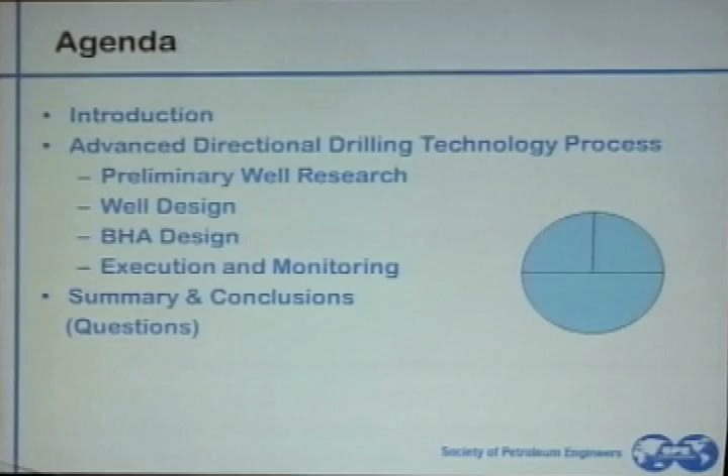The agenda today will start with an introduction, followed by looking at the process. We'll start with the preliminary well research through to execution and monitoring, and then finally we'll have a summary and answer any questions you may have. This is a lot of information to crunch into 20 minutes, so if there's anything you'd like to learn more about after this conference, I'd be happy to see you and discuss further.

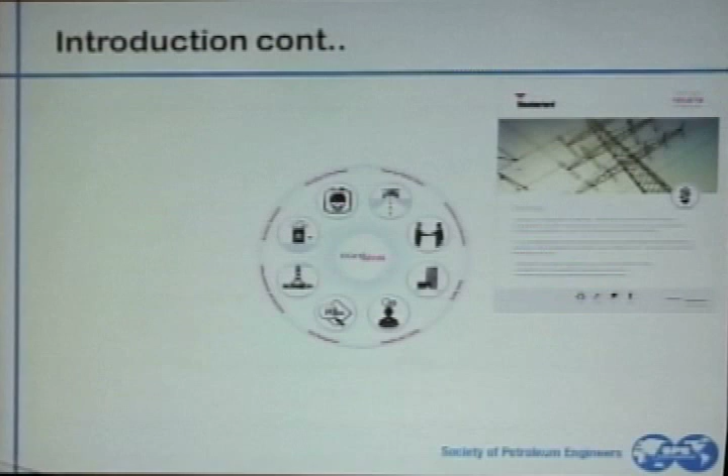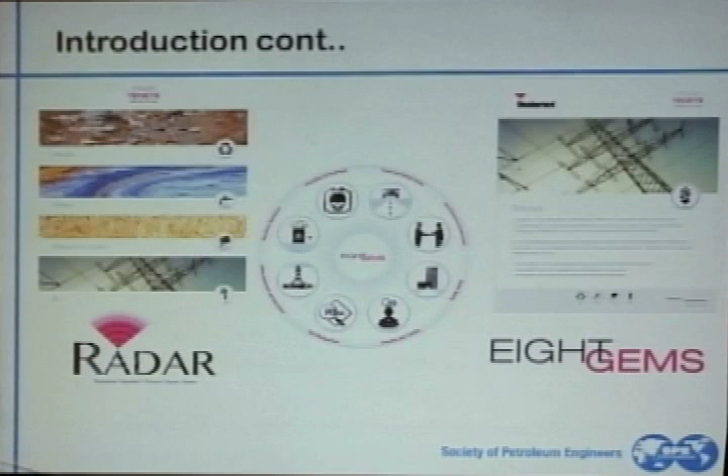Most oil and gas companies and service companies alike have something in their policy statement to conduct operations with minimal risks to both personnel and the environment. We try to make it part of our policy to equip our employees with the right tools so they understand the rules and regulations that govern the countries and environments they work in, not only what they do through their work, but also how they do it in their daily lives.

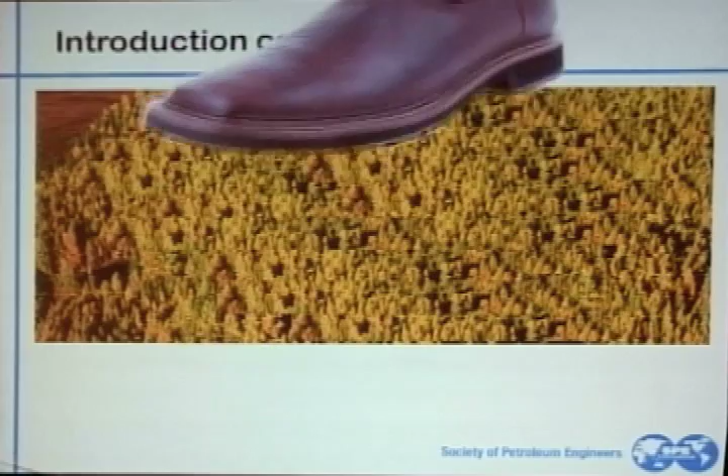But one thing we cannot ignore is that even with these tools, the rig still creates a rather large footprint. This footprint can be reduced, but it takes looking into things like reducing the physical size of the footprint itself, which can be done by reducing the rig size and the infrastructure used on the surface.

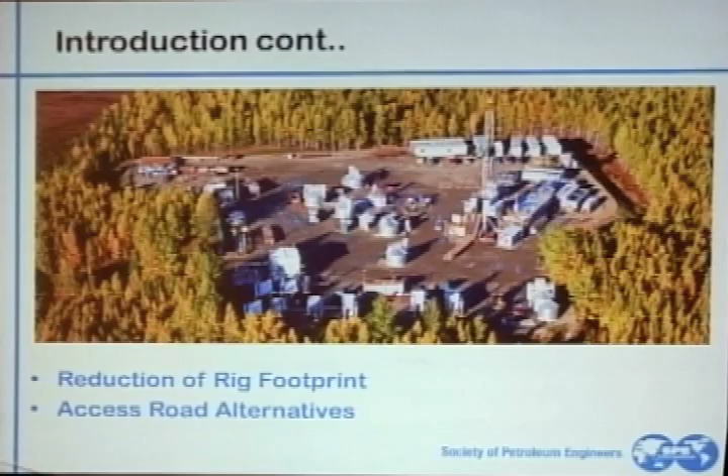But of course, with technology today, demands are to go deeper and longer, so this is always a challenge we're still overcoming. Access road alternatives are being looked at, ways to avoid soil disruption and wildlife fragmentation. Air emission studies are being conducted to reduce the CO2 emitted into the environment.

I want to point in on this CO2 point because it's important to know that when people think of rig footprint or environmental footprint, they can't just think of the actual process being done, the equipment being used, the physical things tied into it, but we have to also think about the time we spend on the actual project.

Air emissions, for example, are time sensitive. The longer we spend on the project, the more emissions we put into the atmosphere. So something a lot of people fail to realize is the time involved.

And finally, waste management. We're working together as an industry. Every year we come out with new technology to try to contain waste management, for example, treating the drilling fluid so it's not harmful to the environment and to the people handling it.

Most, or I should say many, of our locations are quite desolate. There is very little concern about wildlife fragmentation because there is none. Also, things such as noise pollution don't really come into play.

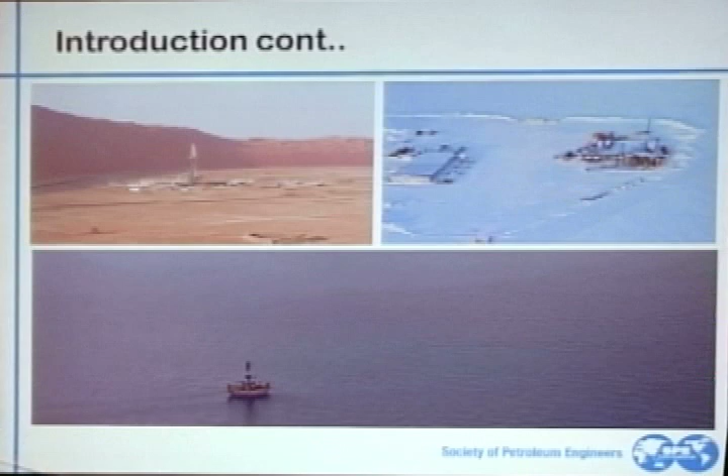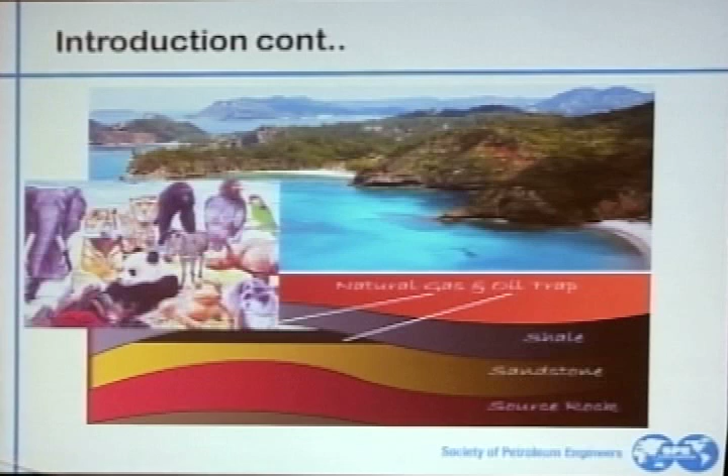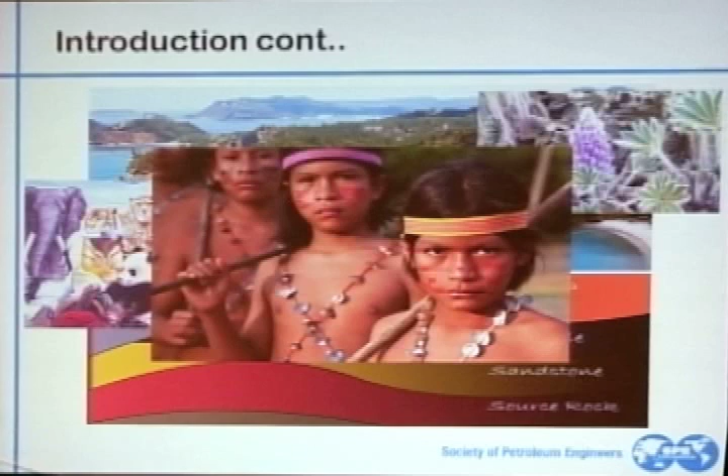But when we're thinking about extremely sensitive environments and want to tap into the reserves below, the challenges we face include endangered species, rare plants or vegetation that rely on a very sensitive ecosystem, or even indigenous people who have had very little or no contact with the outside world and don't care to. These are the intangible things we have to think about when tapping into that reservoir, so we have to ask, how? This poses the question: how do we get here when we have to deal with this sensitive environment above?

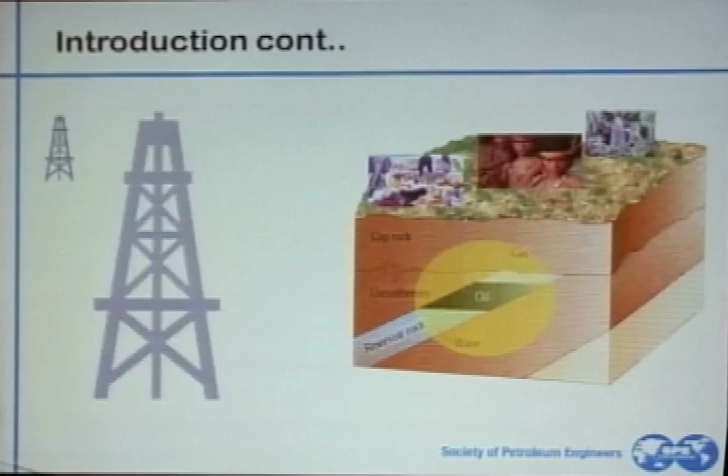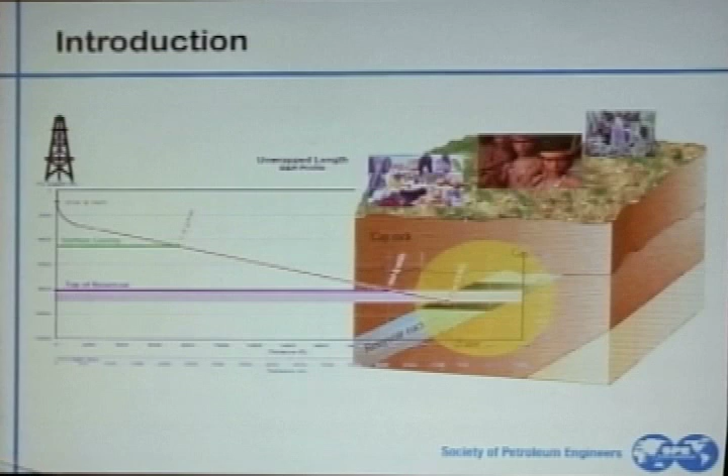Perhaps the best thing we can do is take a step away from the environment altogether and approach the challenge from a different angle. That reduces substantially the footprint above the reservoir, but increases the technical challenges required to drill one of these long, extended wells. So what I'm going to do now is step through the process of what it takes to drill one of these wells.

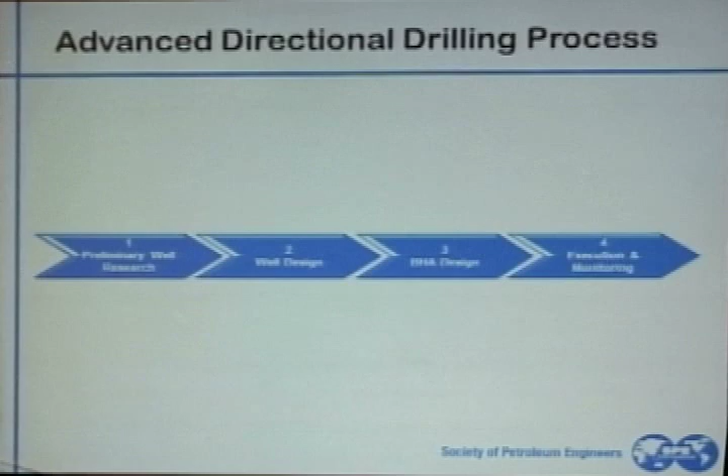Weatherford's advanced directional drilling process is in 4 steps. We start with preliminary well research, finding out everything we can about the formation we're going to drill into, and using that information to design the well. Then we move on to BHA design to decide what we need to successfully reach total depth. Finally, execute and monitor, through drilling process, drilling practices, and ensuring safety for both personnel and the environment.

So we're going to walk through these steps individually, starting with preliminary well research. Geomechanics can tell us a lot about what we're drilling into, looking at the tectonics of the formation and the horizontal stresses that apply. We can learn a lot about what angle of approach we need when we go into the reservoir, as well as what direction.

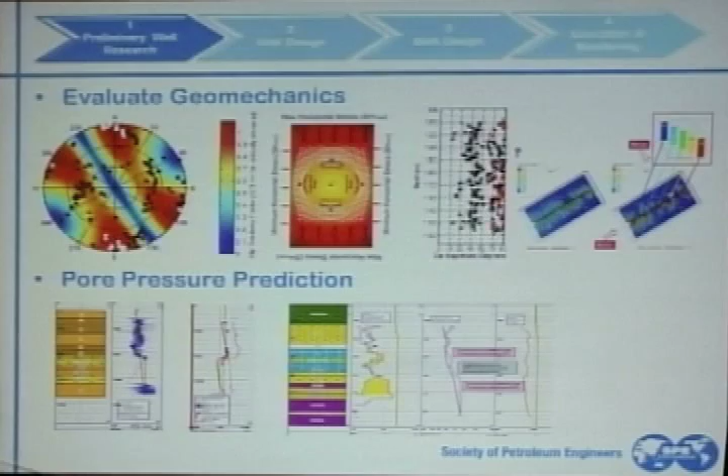Pore pressure prediction: we ultimately want to optimize our hydraulics, which requires us to run up to the max or just below the max limit without compromising the pore pressure. So having a good pore pressure prediction is essential for maximizing hydraulics.

Wellbore stability workflow is about recognizing the things we can and can't control, taking the things we can't control out of the equation—you can't control Mother Nature—and centering in on the things we can control, finding a good process to mitigate those problems and see them through.

Well trajectory analysis comes back to how we're approaching the formation and the type of stresses involved. What do we need to think about with drilling fluid? Hole stability issues, which Latin America has quite a bit of. Casing point selection: how many casing strings are we going to run, what hole sizes do we need, and what's the optimal hole size in the horizontal to keep the cuttings moving up and out of the hole?

And finally, hole collapse analysis. This is basically looking at the maximum limits required to collapse the hole, and then working within those limits by a safety factor.

Once we have all this information, which is very good since we've done a lot of research, we're ready to apply it and move into the well design. The well design is a very critical part—I'd say of the 4 points in the process, well design and execution/monitoring are probably the top 2 to spend the most time and energy on. If you have an improper well design, you can ruin your entire job. You'll have to live with that mistake from the beginning until you reach the reservoir, and if you get it wrong, it can make your life very difficult.

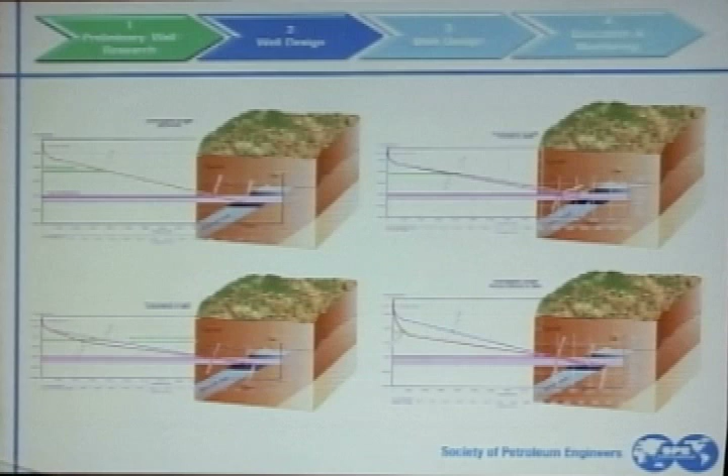So once you have your well design chosen, you move on to actually putting that well design into your well planning software. This can give you valuable information as to what limits you need to have for your BHA, for example, what dog legs you need to create in order to complete the well.

This also gives you good information as to anti-collision, and I'd like to hone in on this part real quick about looking at things from a project management view for the whole project, not just one individual well. Perhaps a lot of information you've perceived is that we do things one well at a time, and that's just not the case. If you're doing a project that involves 10, 15, 20 wells, you look at all those wells on the project from that pad and ensure that the relationship between each well is a stable relationship.

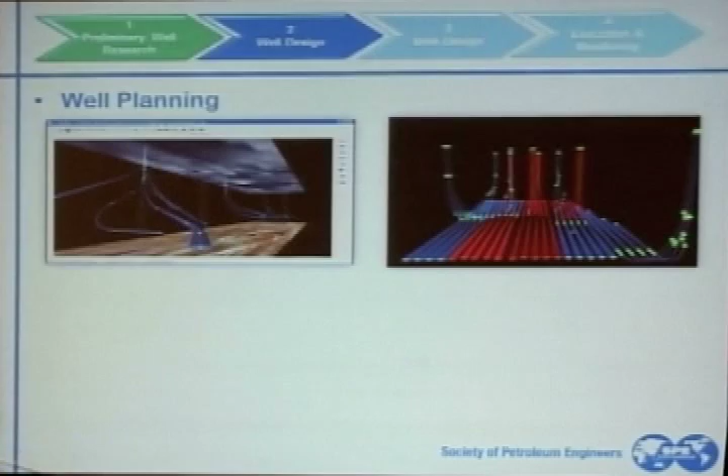If you have a very easy well, even 9 easy wells and 1 difficult well, that 1 difficult well will catch you at the end. So what we try to do is ensure that even if we have to make some of the easier wells a little bit more difficult, to bring the difficult well down to an acceptable level, we go ahead and do that for safety and for the sake of not compromising the whole project.

Torque and drag and hydraulics. After we're finished with getting our well trajectory, we move it into the torque and drag and hydraulics software so that we can determine very important things, especially on an extended well, that we have to live with, which is, of course, the amount of drag that you're receiving from your drill stem.

Because you're going out so long in a horizontal with many miles of pipe, you basically have all that sitting on the well bore, and you're trying to push it through to get to TD. So drag becomes quite an issue, as well as torque - being able to turn that pipe with all the reactive torque and the torque power you need on surface to be able to get the bit to move. Hydraulics, of course, moving cuttings up and out of the hole, are always important as well.

One thing to note about torque and drag is we can identify such things as sinusoidal or helical buckling that can occur in a well bore. So if you're going through your kickoff point and landing point, which is where these typically occur, your pipe can buckle in kind of a snake profile, or even helical, which is where it bends down on itself, and that basically stops your bit from moving forward, and you're stuck. You have to basically redesign the BHA.

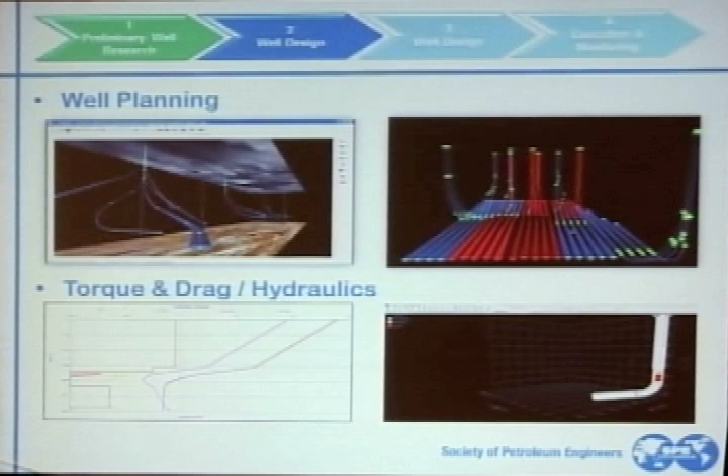So what we try to do is identify that up front with the software so we can avoid it at the rig site in real time. It will take well design to reduce that and ensure the dog legs are low enough so you don't incur any buckling. But in the case that you can't reduce it anymore and you're at your max with the well design, you can always move interchangeably between these two, going to the BHA design to help mitigate those trouble areas. Ways to do that would be, for example, to roll the pipe through rather than drag it. We'll talk about that later in the BHA design.

So now that you've got your well design, it's time to put tools in the hole. For directional drilling, you really only have one tool of choice to drill this type of project, and of course that's the rotary steerable system. Rotary steerable gives you true 3D drilling.

It allows you to move inclination up and down as well as directionally without having to pull out of the hole and change BHA. It gives you continuous rotation, so in those points you can rotate continuously to move the cuttings to the upper side of the borehole, which is where the higher angular velocity is, to shoot the cuttings down the conveyor belt. It also allows you to have a smooth wellbore path, so you don't have any ledges that you would typically have with a mud motor.

Ledges are points of hanging up as well as additional friction, which you can't live with, because you've already got so much pipe out in the hole - you've got enough friction to deal with already.

And of course, no sliding, as you would with the mud motor. Sliding takes time, as you all might know. You have to pick up, orient, get your slide in, especially with as much reactive torque that you're dealing with on these long wells—it's just not possible. You can see here with the profile of sliding, with the slide drill, it creates what we call tortuosity in the wellbore. That's what we were talking about with the additional friction that's applied.

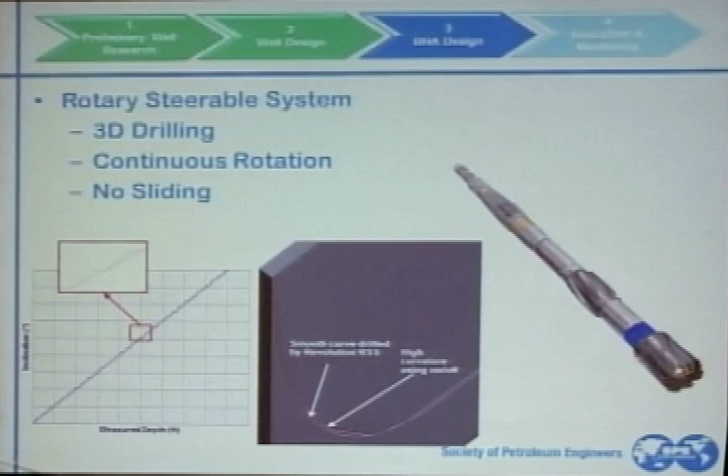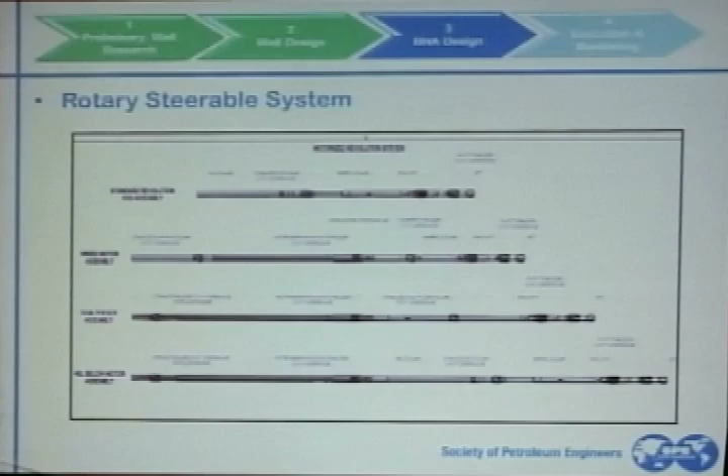Rotary steerable systems can be used in conjunction with different BHA configurations. A popular one is to mount it with a mud motor above it. This allows the mud motor to turn the rotary steerable faster, which gives you a faster bit speed, so you can cut the formation more quickly.

I'm going to divert to our K&M guys with a very good point that they made: it's not all about speed, it's about optimizing. If you're drilling so fast that you overload your hole with cuttings and you're not properly moving it out or creating a smooth level of cutting beds, you're going to wind up having yourself some problems there. So the key is to drill as optimal as possible.

Just a couple quick examples of rotary steerable in action. This is one that set a footage run in the Eagle Ford. It was an 11,900 foot single run. Started off in the vertical at 5,600, basically kicked off, built the curve at 8 degrees per 100 foot, and then drilled the lateral to 16,559.

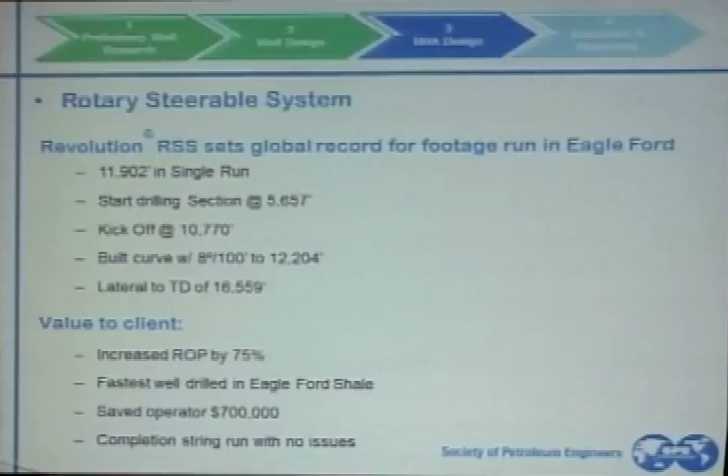The value to the client, of course, was a 75% increase in ROP from the conventional mud motor assembly. It was the fastest well drilled in the Eagle Ford, saving the client $700,000 ahead of AFE. So again, driving home the point that this is a faster system, it's more efficient, it saves money, it saves NPT, and it saves that time that we were talking about earlier with the emissions to the environment and our footprint, how long that footprint remains on the project. So something to think about there.

5 minutes more. Another quick example, over 13,000 feet in a single run. This was a record that we set in the U.S. It saved 2 runs ahead of the associated costs. This, again, was a build. This actually was a vertical built to 8.5 degree. They kicked off at 8 degree per 100 foot build and turn, and then they continued the lateral from 7,200 feet to TD of 14,000.

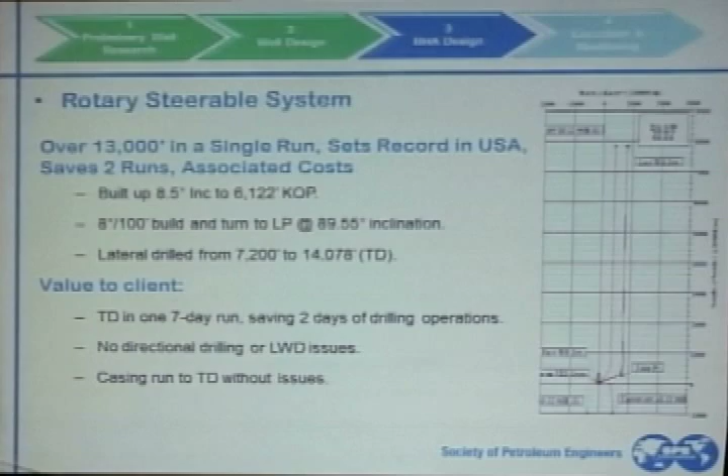This was a 7-day run, single run. That's the great thing about the rotary steerable, is that you're not tripping out and changing BHAs to be able to make your build and your lateral, etc. It saved 2 days off the drilling operations, again, ahead of AFE. And they were able to get the casing run to bottom with no problems, so there's no ledges or tortuosity they have to deal with to run the casing.

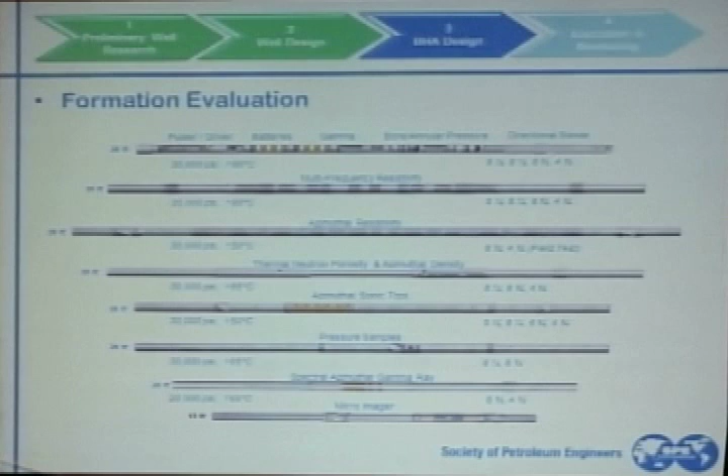Next, we move on to the formation evaluation tools we'd select. This is the MWD/LWD. You have quite a suite to pick from with most service companies, and the main thing I'd like to drive home here is to ensure that you have some type of bore and annular pressure sensor. Because the LWD is in the BHA, it's on the biggest collars that would be on the drill stem, and having an annular pressure sensor there is key so that you can ensure cuttings transport and monitoring those, as well as monitoring your ECD.

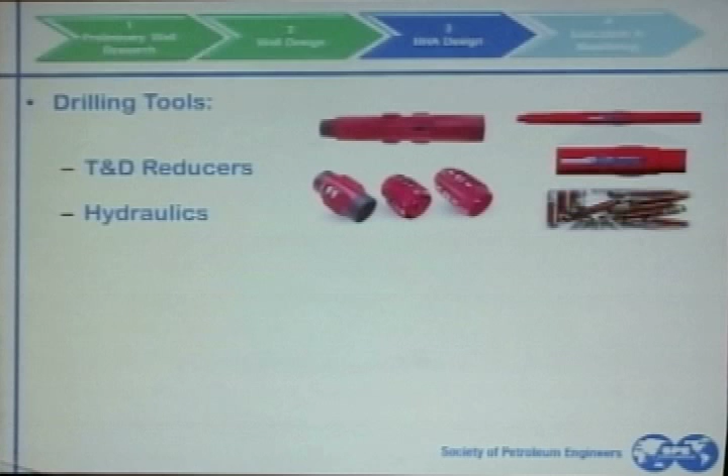Drilling tools is the last thing that we're going to add to our BHA if needed. As we were talking on the well design phase, when you're dealing with sinusoidal helical buckling issues, you could mitigate some of those areas by adding rollers, torque and drag reducers that can help you roll that pipe through that trouble spot rather than drag it through and have that high buckling point. Also, we have the case of hydraulics—if we need to improve the hydraulics, we always have under-reamers that we could default to.

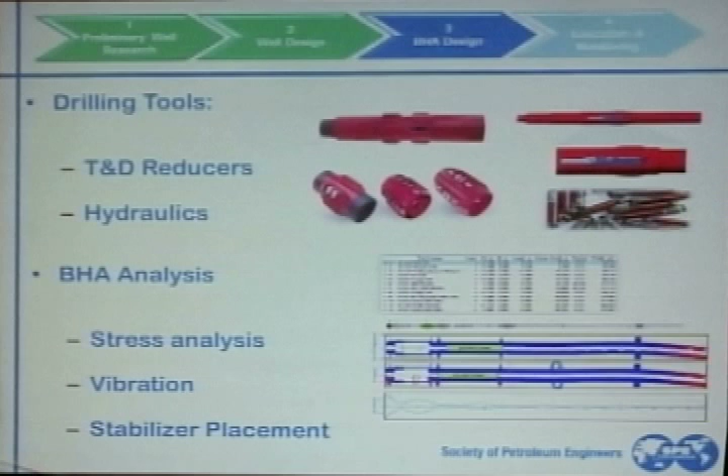The BHA analysis, finally, is conducted with the BHA that you finalize for the project. Basically, you run the BHA analysis—it's a software-based program to see how that BHA will react in the well design that you chose. You could find out a lot about the contact forces of that BHA, the type of stress that you're going to be looking at, and the vibration that will be incurring on the MLWD package that's in hole. No one wants to trip in hole, drill as fast as they can, and then have an MLWD failure that they got to trip right out of hole to change the BHA. So we try to make sure that we cover all the bases, including keeping the integrity of our drilling package intact.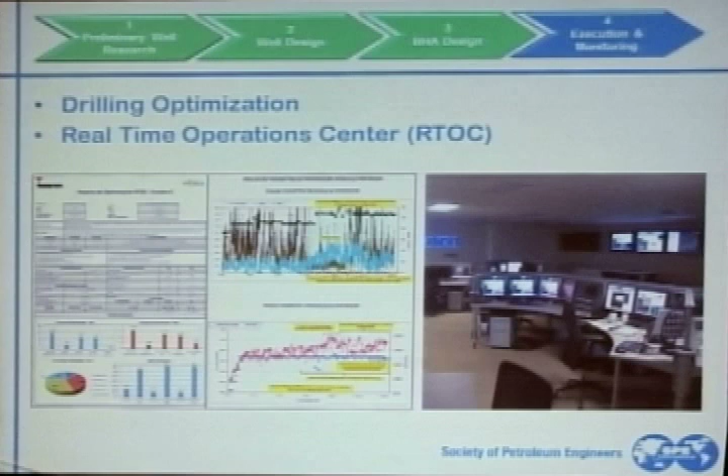Finally, on the execution and monitoring stage, we have the drilling optimization and real-time operations centers. This is the second most important part of this phase process. Drilling optimization is key because it brings in project management experts with extensive knowledge on drilling extended wells. They can sit in a room with colleagues and watch the well, both at the client's office, on site, and from one of the RTOC centers. This helps them monitor best practices and avoid train wreck situations from happening, which is valuable both to the safety of personnel and to the environment.

I'll show you a real quick example of how that action can happen. This is a well that they're tripping in. This is measured depth on the bottom and hook load on the vertical. As you can see, they're just tripping in hole. They finished TDing the well, came out of hole, and now they're running in for a clean out or wiper trip. They run in, everything's fine.

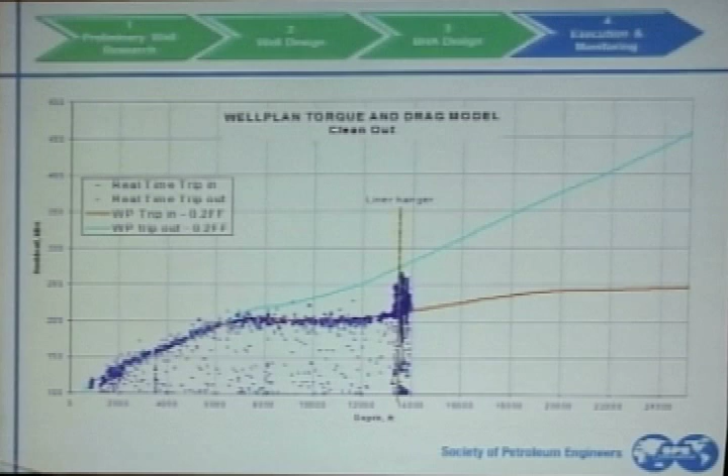They're running on the friction factor line, and then they get to the liner hanger. Suddenly they start having problems. They have to work the pipe up and down. This is an indication of a cuttings buildup at the liner hanger. So when they TD'd the well and pulled out, those cuttings were dragged back up to the liner hanger, and now they have to fight their way through it.

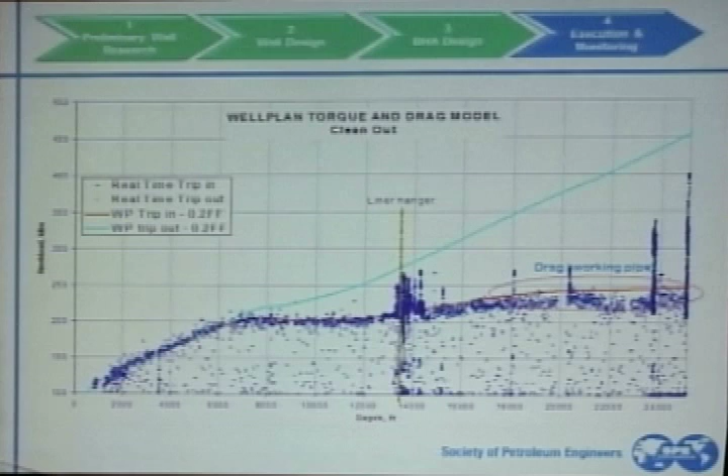Now we get out into the open hole, and you can see the amount of drag that's building and the amount of tight spots we're having to work through. These are cuttings beds that have built up and need to get cleaned and smoothed out so we can get this production string to the bottom.

Pulling out of hole, you can see how much drag has now increased on the drill stem—another indication of a lot of cuttings pulling back the stem from coming out of the hole smoothly. So at this point, we know we have to do another clean-out run to get all the cuttings moved to the bottom of the hole.

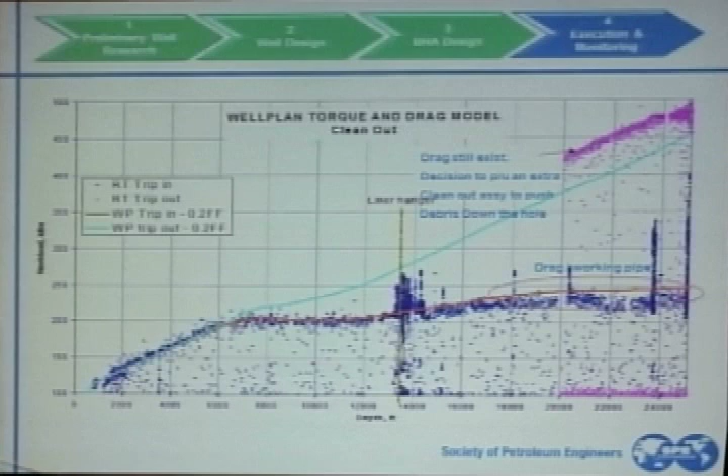If you're not monitoring this and just let it go blindly, relying on the driller to trip out of hole without even knowing what he's looking at, you're going to run that casing string into the hole and wind up having a big problem—possibly stuck pipe that you might be fishing out for two weeks. So something to think about.

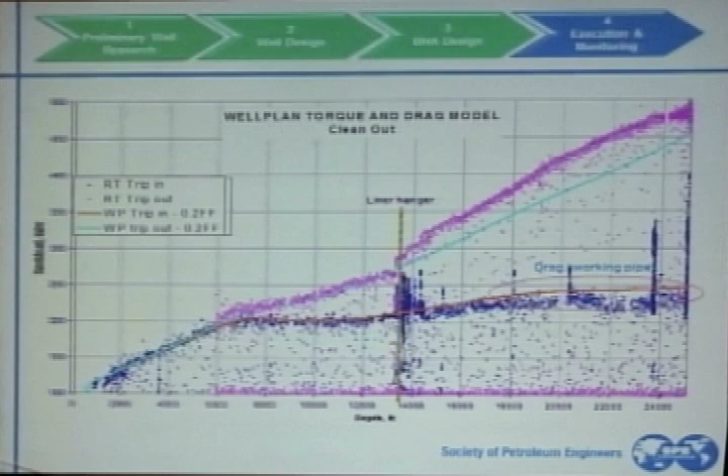Pulling up to the liner hanger, the cuttings drop off here, and pulling back out of hole, no problem. That concludes the phase process.

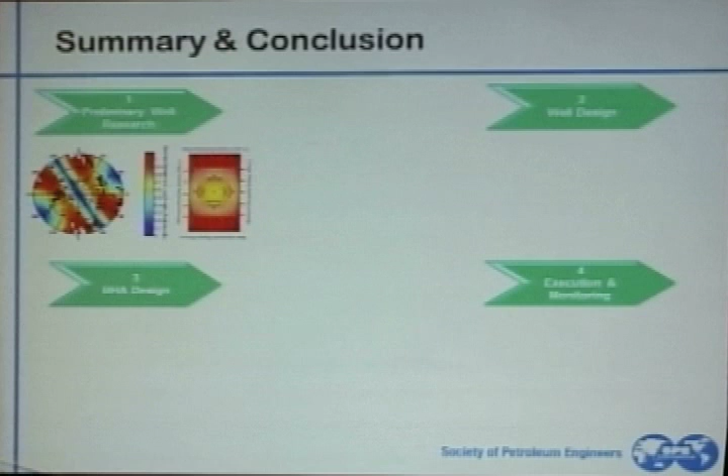I'll run through a quick recap, starting with the preliminary well research. We talked about geomechanics, how that's used to identify the formation we're going to drill into, pore pressure prediction, etc. Gather as much information as we can to use in our well design to decide how best to drill the well and ensure we have the lowest torque and drag and the most optimal hydraulics.

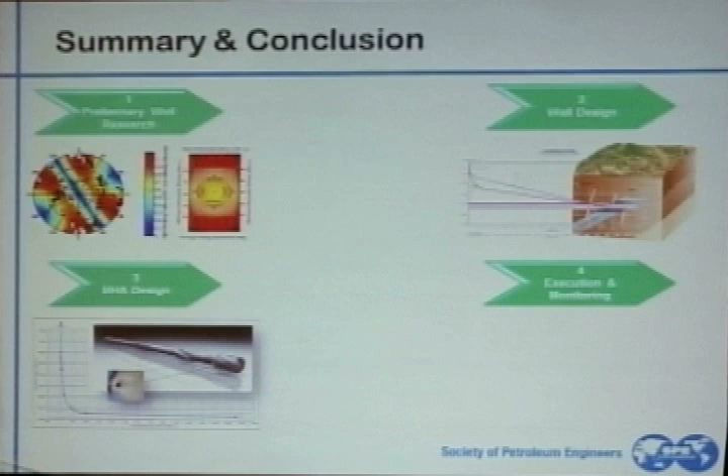Use BHA design to design what you're going to put into that well to successfully get to TD of that well design. And finally, execution and monitoring to observe the drilling process and ensure the integrity of the hole and the safety of the personnel and the environment.